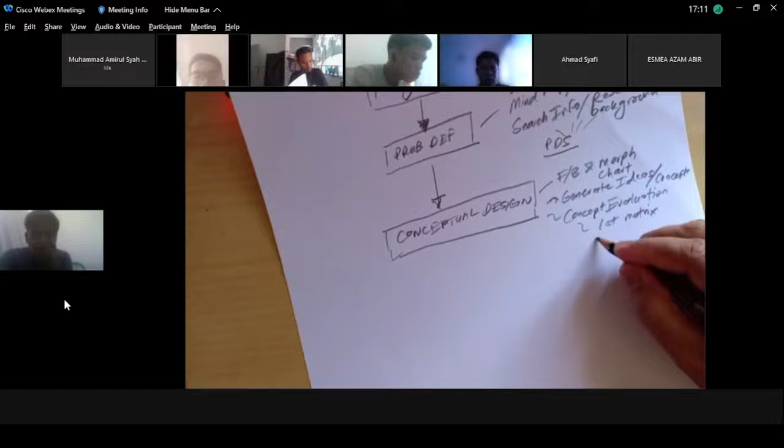Then you generate ideas or concepts, then you do concept evaluation by the first matrix and Pugh matrix. This is already done, I asked you to do it during the break. From the Pugh matrix, the result gives you your final design. This will be your final concept or final design. This is your final concept.

Detail design means you do engineering analysis and engineering drawing. Engineering analysis first, and then at the end engineering drawing. After engineering, then only you do fabrication, you start doing your prototype.

But we don't go straight from final concept to detail design. Detail design means you have detailed everything and document all your design. You have to do detailed analysis, meaning engineering analysis using your knowledge from machine component design last semester and strength of materials, and also ergonomic studies. That is detail design.

And also after engineering analysis and ergonomic studies, then you will do engineering drawing. That one is detail design.

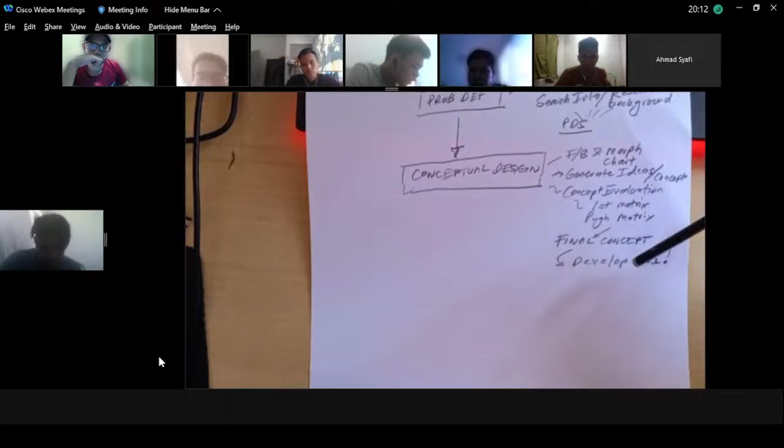But for the final concept, you can identify all components because this is your final concept. You need to explain and discuss with your group members. You have to develop more detail about your final concept, meaning you have to identify which is which, in terms of what components and parts you design and introduce in your system.

You can identify it, even a single piece of component, like even a single screw, bolt and nut, also must be included. Understand that, guys?

At this moment, understand? You need to detail your sketching because you want to design this thing. This will be your final design, final concept, so you want to develop more. It means you need to identify all the things involved in your design.

If you design a device, you have to know everything, every part, component, bracket, supporting structure, all the components, even the component next to another component. It's not just saying this is connected like that. How does it connect? How is this part connected to the second part? How is this part connected to the next part?

It's not just hot glue like that. Is it joined by bolt and nut? Is it joined by snap fit? Is it joined by welding or something? You have to identify how it connects. Every possible thing you have to identify in detail.

You can develop the final concept more because we want to make things happen. So this final concept we want to develop. This stage we don't call detail design - detail design, I said, is engineering analysis, ergonomics, and also engineering drawing.

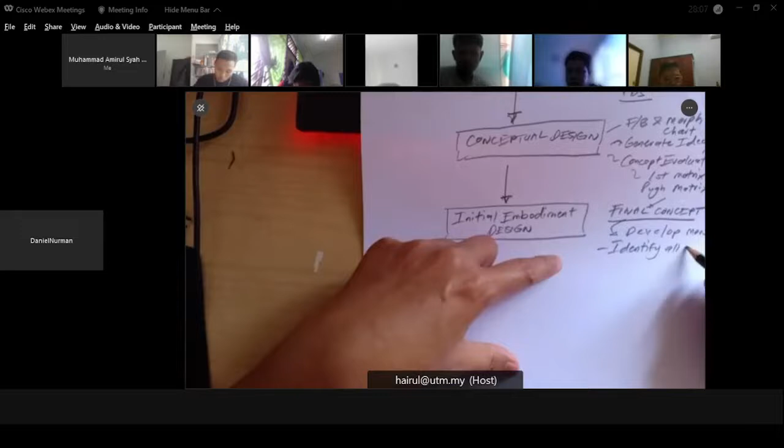You develop more, I mean you've got to, for your final concept, identify all parts involved that you introduce in your final concept. Even a single tiny thing, the jointed elements, screw and nut that you introduce, must be included.

There's no such thing in your sketching, when you do sketching, no component floating in the air. You understand what I mean by floating in the air? No such component floating in the air in your sketch. Understand, class? No such thing as a component floating in the air.

You understand what I mean? There's no such thing as a floating component. Betul tak? Maknanya screw apa semua kena buat juga ke apa? Yes, kena introduce. You can identify where is the screw.

Kalau you punya component, for example, you punya feeder tu kan. Katakan your final concept is the whole system mounted on the cage, on the kandang, because I believe your customer, your sarjana person in charge, already gave you the layout plan. By now you already have the layout plan, the dimension. So how you mount your feeder on the layout, you have a sketch on that, the dimension of that feeder, the detail sketching.

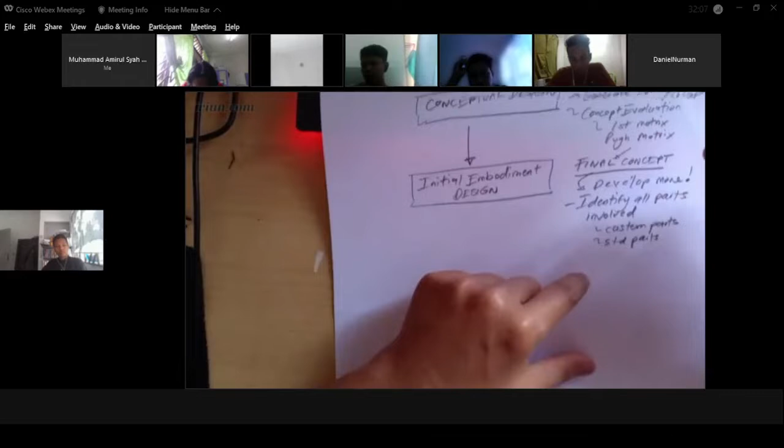You kena identify all parts involved, and also you have to select material. This is important, this is crucial also. Select material. How do you select material of the parts? Parts that you introduce, what is the material?

Okay, certain parts of component dalam your final concept, some of them are critical. Component and critical tu, kalau component like standard part, it's not that. Selection of material is quite easy, straightforward lah. Maybe you select based on the standard material available there in the market.

Tetapi there is certain part, certain component in your final concept, like a bracket, a structure, that is critical, that is supporting weight, that sustains load. The component that is critical. Critical means this part is critical in terms of when your concept, your system, in performance, when your machine is running.

Certain components or parts are critical in terms of loading and in terms of the surrounding boundary condition, depending on the boundary condition. For those critical components, be careful about material selection. I'll show you a video on material selection later, which is crucial only for critical parts.

For components like standard parts that you think you can get easily from the market, you don't need to do that selection process. Just mention the material in the BOM, in your sketch. But for certain critical components, supporting structures when your machine is running, these components sustain load, so be careful about material selection. I'll show you the video later and share it in the WhatsApp group. That's how we select that material.

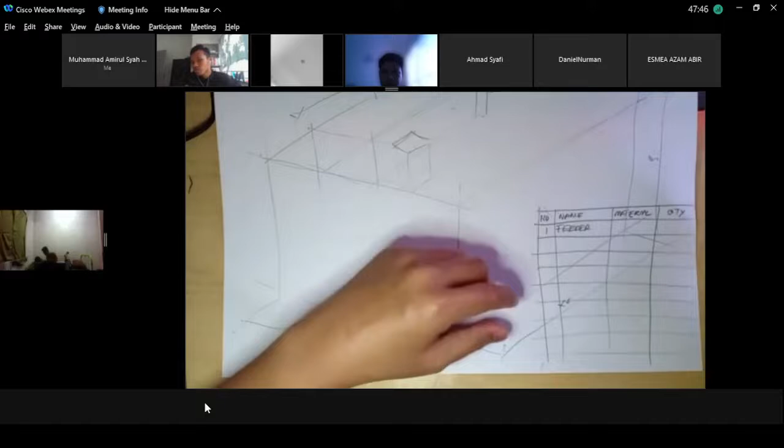Have to be accurate to select the material. Have to be really careful to select the material. Yang macam feeder ni tak perlu lah. Feeder just continue use, tengoklah the one. Tapi be careful. You must obey the what is requirement from the PDS. PDS under heading material ada mention that all the material component can withstand corrosion kan, because you involve your feeder involved with what food you want to contain. It's a cow food, tengok the condition cow food, so your feeder have to be really kind like a standard lah for that one. That cannot easily corrode, can withstand corrosion, cannot get rusted, and itulah they don't have chemical effect.

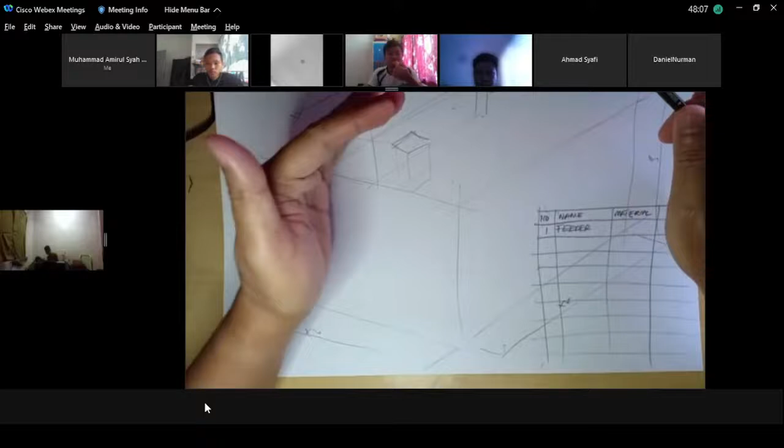These all the statement that already stated in your PDS under material. It's there already. Make sure your PDS tu yang detail lah. I need to check nanti your PDS. You must obey the PDS material part that you introduce, the size that you introduce, must obey all the requirements that we set. Because your PDS also ada mention about heading size, the size of your overall system. Make sure that you obey all the requirements set in PDS. That's the idea of this embodiment design.

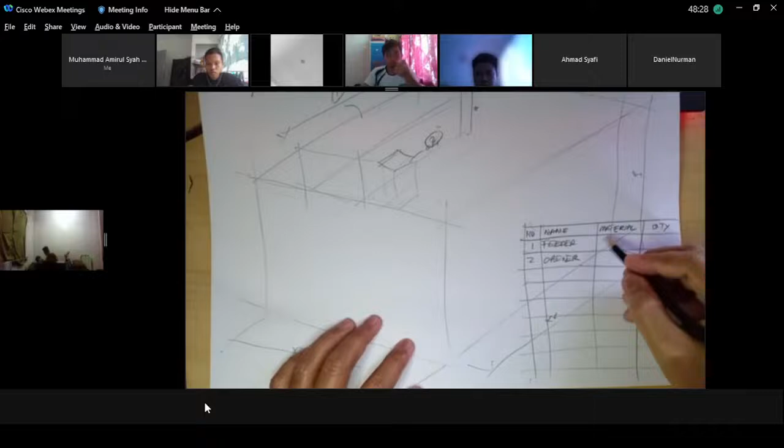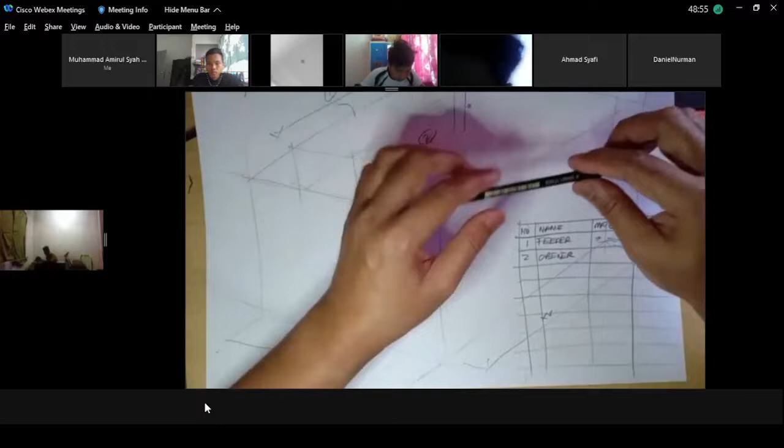You can use steel but it can get easy corrosion, rusted right. What material for the feeder? You need to check, because your PDS already stated what material for this. That's why in the standard there's legislation, if you check the legislation on cow handling, it mentions what material to select for the cow handling device. What material is the opener?

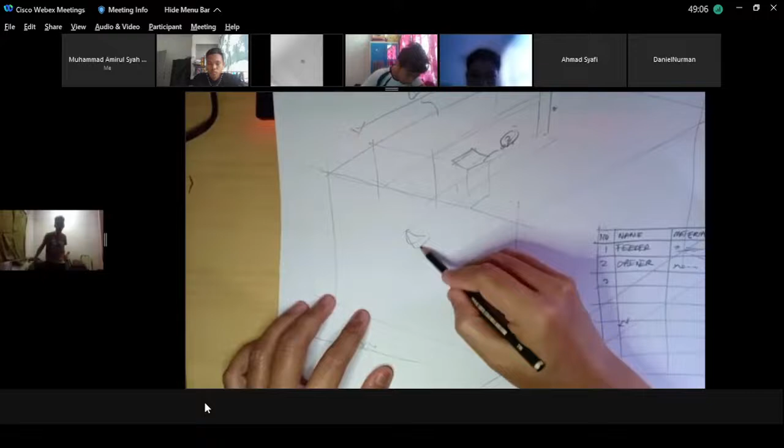Then you have the conveyor, how is it shaped. Conveyor has to be detailed. Okay, this is the conveyor, this is a rough conveyor. This is the BOM of the assembly, rough mode. What is the material? This quantity is 1, this is 1, maybe 2 - maybe one of the group is doing it symmetrical, 2 rows, 2 rows. Say 2, 2 rows. 2, feeder 2, feeder 1, this also 1. Feeder has 2 - you have left and right row because you have a partition.

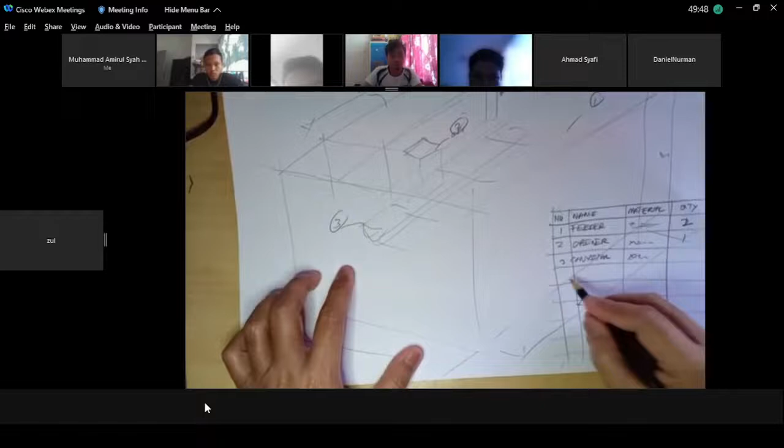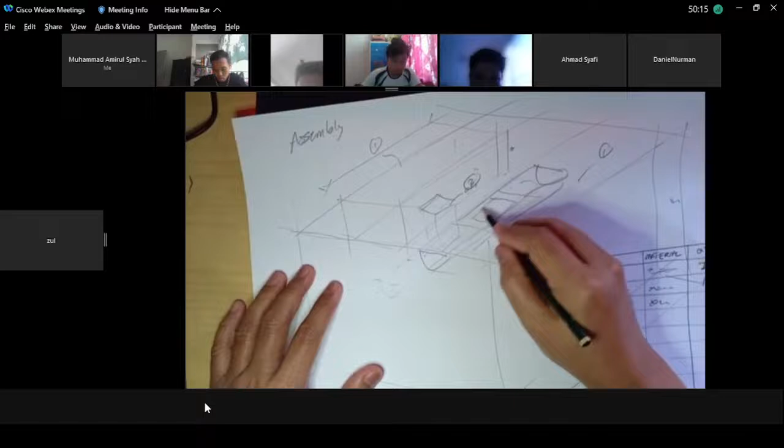Okay, here you have the distributor, you have the partition. This is conveyor, number 3 is conveyor. See it has an indicator, labeling shape, number, and 4 - how you distribute the conveyor, how you distribute it, like the start of this conveyor is the shape, and how the system works, or you focus on sketching the distributor - what is the mechanism when the conveyor distributes the food. This one is for the distributor.

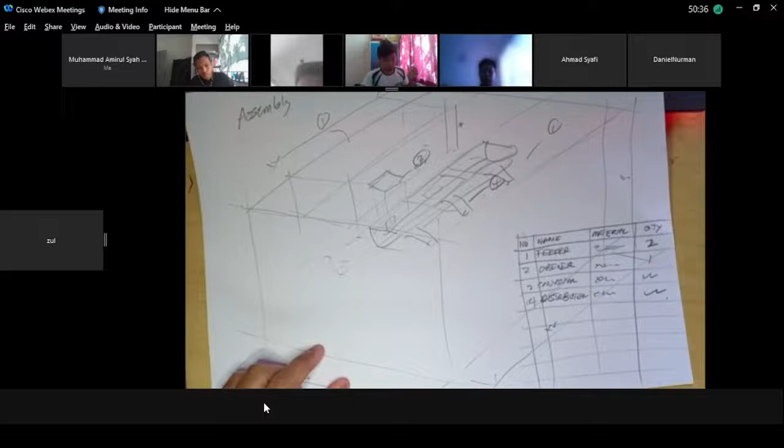Understand guys? What material, what quantity. Do you understand, class? Are you with me or not? Yes, understand Doctor. You make the detail like that.

This is the full assembly first, one sketch of the full assembly. There's a component number, there's a BOM - that's the rough BOM. Under a category - after distributor what's next? Remover accessory, food remover, something like that. Right? Right. Remover, I don't know how you name it. Remover, food remover that's an accessory for food. Excessive food remover - what material?

Where is the food remover for the excess that falls? What system do you use, sketch this. That's it, this full assembly first. You make this one the full assembly, with the dimensions also of the layout plan, the size of your cage, basic dimensions of your tank, and the length of your conveyor, the width, the overall size, not detailed yet.

Okay, this one your subsystem intact. This sketching is the full assembly, everything in assembly mode. Assembly mode. Clear? This one clear? Understand? Any questions from earlier? This is your first sketch. Any questions? Detail - I'm showing you this isn't proper, isn't detailed. You have to be detailed enough.

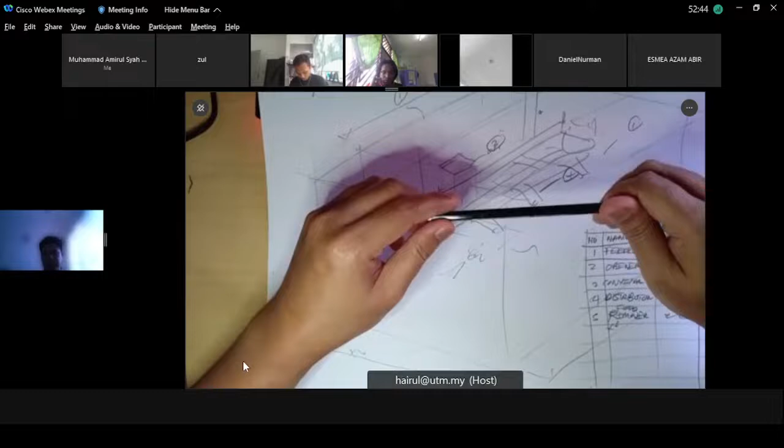How - any other idea? Any idea? It's dangerous, you know, this could be very dangerous if you just guess, that's not allowed. Because I want you to work as a professional. A professional cannot do it like this.

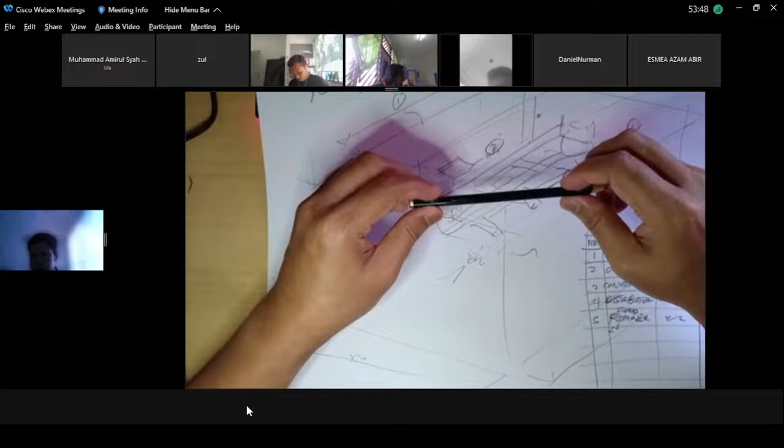What about the other group, the other session, kelas lain ada tak? Dapat apa-apa? Korang ada group WhatsApp yang ada sarjana field? Ada, sebab Cik Kadir tadi balas dalam tu, dia kata tak ada. Tapi pun kelas lain macam mana dia nak buat kan?

Kalau korang punya sistem nak mounted dekat cage, betul kan? Betul tak korang punya final concept? You want to mount, you want to fit your system on dia punya, what is your boundary? You have to know the boundary. Kalau tak ada boundary macam mana? You punya cage itulah, you punya surrounding itulah. Macam mana kita nak guess tu? Dia punya size of the kandang cage.

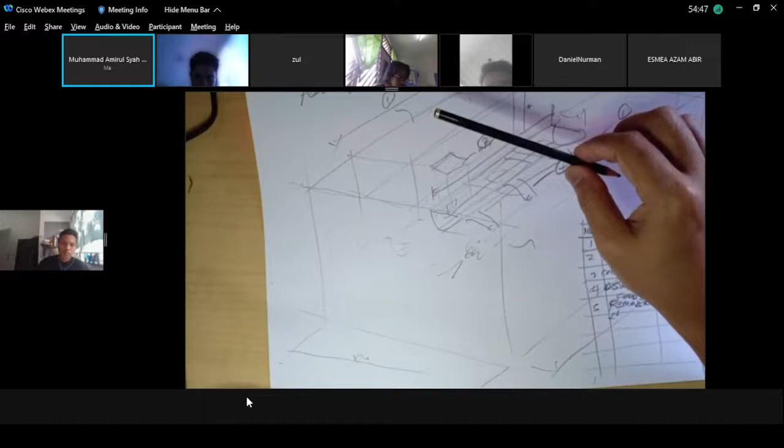At the moment dia punya lembu ada in cage, ada dalam dia punya partition tak? Tak ada. Currently in the cage, bebas, no partition. Dia bebas dalam cage tu, tak ada partition untuk satu ekor. Okay, maybe your final concept you introduce partition lah. Maybe your system, you mesti ada dia punya dimension of overall tu.

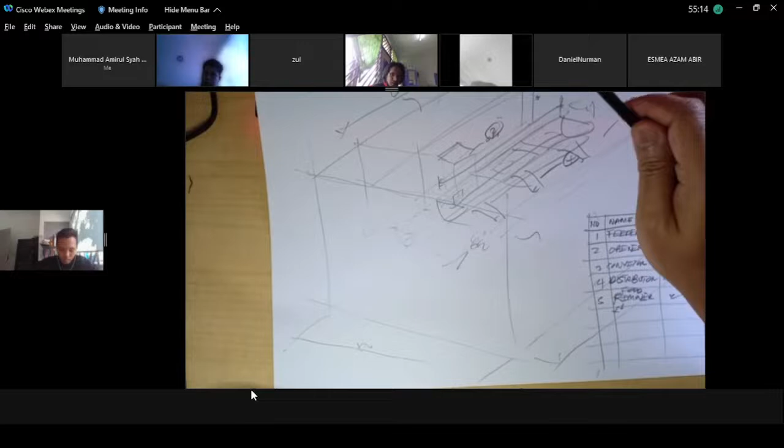Kalau katakan you cannot get it, can you get any standard cage from internet? This is your project guys, you have to make an effort. You can immediately dapat mana-mana cage layout plan yang as a standard can be implemented. Preferably ask dulu Encik Kadir, do you have it? Kalau dah memang the answer they don't have it, okay tak apalah nak buat macam mana. So you have to find from Felda or any from the internet lah.

So okay, my point is, can you get the dimension of your boundary? Boleh dapat? Get it immediately, and this standard cage, boleh guys? Kalau tak ada tu, you tak boleh buat sketching ni, you tak boleh buat initial embodiment design ni. Mesti ada, boleh kelas? Okay, buat benda je, dapatkan macam mana cara je lah you boleh dapat.

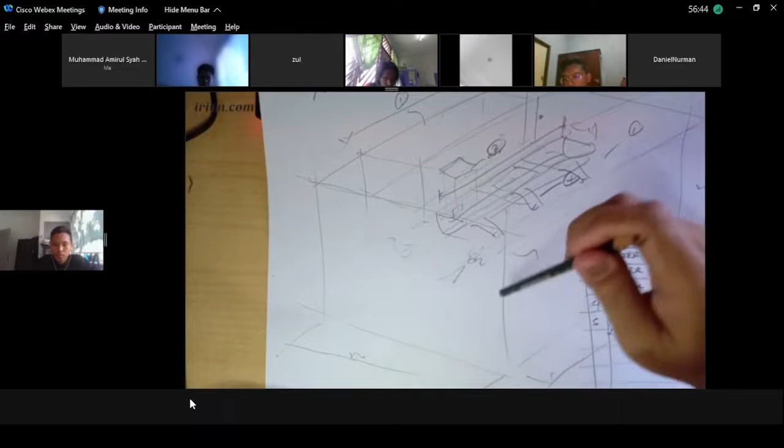Ceiling dia tak ada, dia tak ada no ceiling kan? Okay, so you need to know the condition of yours and also the dimension of it. Tak boleh dapat daripada dia, you try to design your own, boleh? Okay, you already visited the place, they don't have ceiling kan? They only have roof kan, no ceiling. Okay, you design the structure. Faham tak sini? Dia tak ada ceiling.

Guys, can you see my video tak? Ada technical error ke apa ni? Boleh doktor, okay, nanti kau buat macam ni tau.

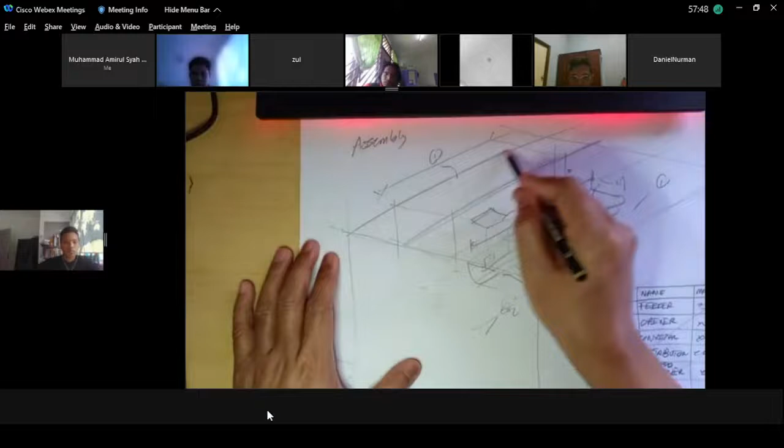Okay, let's say ni layout plan. Saya believe dia bumbung je kan, only roof, right? Plus, can you see my sketching? Nampak tak? Nampak doktor. Pasal korang ni ada boom kan, ada boom structure, betul tak kan? Ada beam kan? Hello? How you introduce your final concept tak? You have to specify all the part that you introduce, you want to mount on yours. Ada boom sini, ada apa ni, very long beam where you want to mount, where you want to fit your mount, your feeder.

Okay, the boom, kena letak sini komponen ni. Ni komponen ni apa nama dia? I didn't mention, boom is not the right word, we call it the beam lah, beam, horizontal beam. Ni komponen nombor berapa? Nombor 5, nombor 6, horizontal beam. Understand tak? Ada 2, how many?

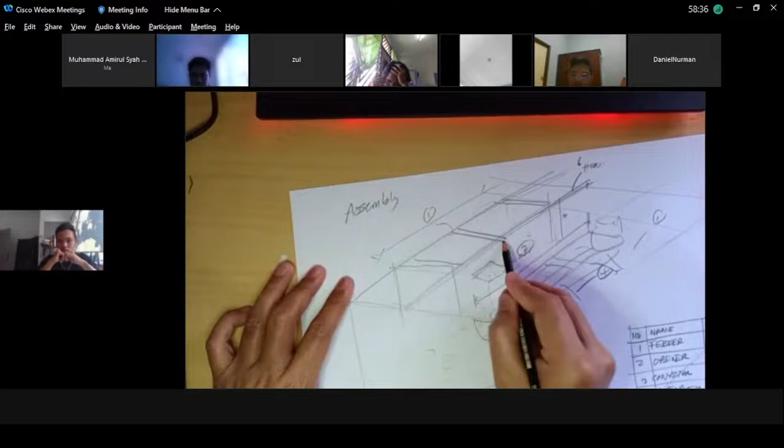And also you ada cross member beam, betul tak kan? Ada cross member where you mount, you want to mount, katakan your feeder tu mounted on the ceiling, you kena introduce ni dalam sketch. Faham kelas? Yang penting dapat layout dulu size macam, okay, I believe dia punya bumbung like that. They don't have ceiling, right? Betul kan? Just bumbung only, just only roof, no ceiling. So you have to design the beam.

Pasal guys, you are fourth year, betul tak guys? You know what component is it kan? Boleh tak sketch benda ni? Komponen apa ni? Kalau ikut standard kita pakai apa? Boleh doktor, insyaAllah. Horizontal beam you design or you order from the hardware? I want to ask you guys, what beam you use? You are already fourth year guys. Apa beam kita pakai? Box section ke, C channel ke, I section?

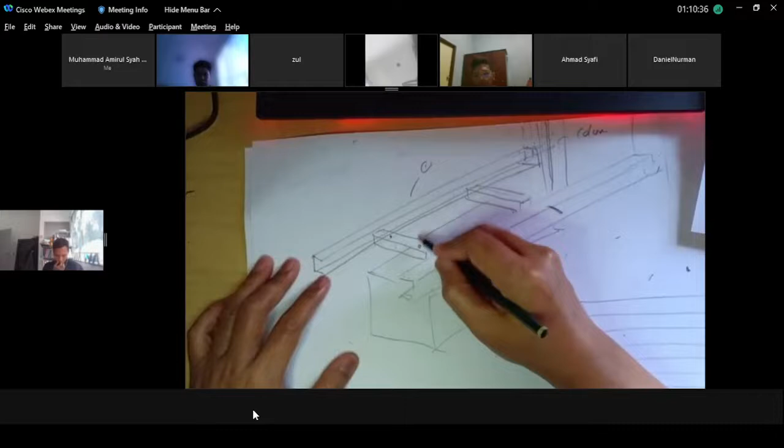How does this connect? This is what I'm saying - at this initial embodiment design stage, your sketching has to be proper, guys. If you don't identify all the components involved, you will have a lot of problems later.

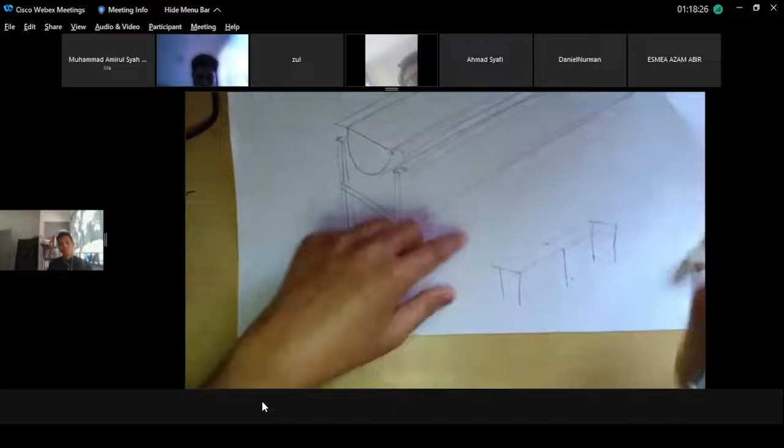Kalau macam ni dia tak teguh kan, so how many leg that you need. Okay, kalau you tak boleh letak cross member kat sini pasal you want to mount the conveyor, so how you design supaya dia keep stiff dia rigid. The leg tu, how you design the leg tu macam mana.

Maybe you buat construction terus ada kaki macam apa, ada kind of structure like this ke, semua ada cross member kat bawah ke, or maybe kalau you can make it, dia ada cross member. Kalau you cannot put cross member, kalau you ada cross member macam ni, you tak boleh mount you punya conveyor.

Dia mungkin you conveyor, okay, conveyor have to be mount on top gitu. So you punya supporting leg ni have to ada cross member, have to be rigid enough lah. Yang ini dia kena rigid lah, dia ada cross member macam ni, cross je ni ke. How you design dia punya structure tu lah, dia punya leg. Okay, dia rangka macam tu.

So my point is, so lah you kena proper kat sini. Yang conveyor tu, okay, conveyor tu how do you move it? Dalam you punya final concept, you punya system, how is the mechanism that convey the food? Kalau you pakai flat bed conveyor, so kalau katakan you punya design pakai flat bed conveyor...

So you don't need to do detail sketching lah, as long katakan you order this conveyor. Katakan your conveyor tu you order from the internet, they have a standard conveyor. Okay, design ni bukan semua kita design on our own. Kadang-kadang we have to play smart. Sometimes kita tengok whatever current supplier already there.

Then the distributor, looking at the full assembly, after the conveyor, how do you distribute the food? I don't know, is your conveyor moving or just placed under a container? Maybe you make it slanting, I don't know, that's your concept, the slanting is there, but this is wet food. If it's wet food, I don't think a gravity-based slanting conveyor will make it flow down. Maybe you use a shaking mechanism from the opener, from the feeder.

If you have just a simple channel, you don't have to buy a flatbed conveyor, which is very expensive. Or a screw feeder, also good, very efficient to distribute the food equally, but it's quite expensive. If you just use a simple channel, but make it slanting to distribute the food, because it's wet food mixed with something like grass. What do you call it, what shape is your food?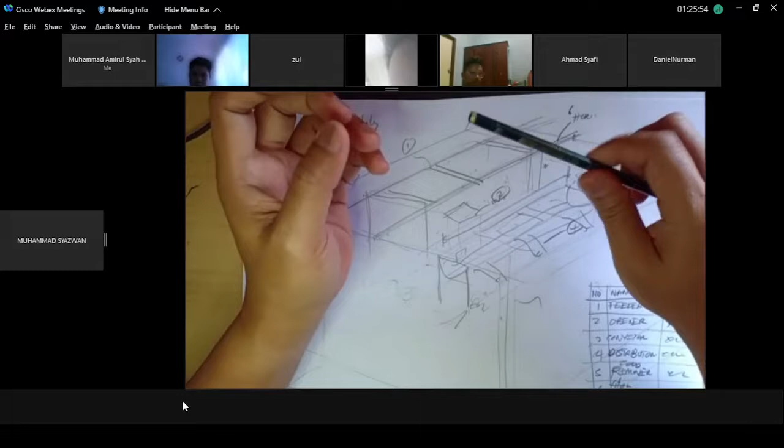Kelas food dia apa? Food. Kalau kelas, orang yang do the research, come on, the food tu what type of food? Food dia material dia apa? Condition dia? Apa dia punya form and shape, the food? What kind of food dia tu? Is it granular or is it wet food, macam mana tu? Campuran the apa? From apa? Ubi kayu, jagung, ampas jagung, apa ni? Plus, are you listening or not? I'm asking you. Yes, betul.

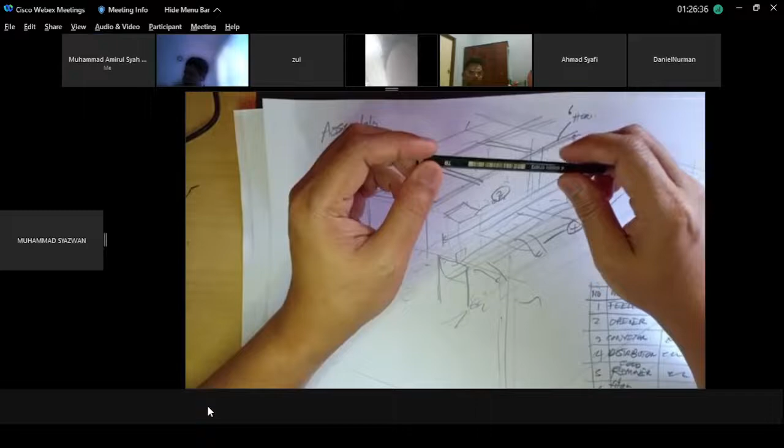Food dia macam mana condition dia? What type of food? Cow food? Rumput ke apa? Potong halus. Campur apa? Plus, campur dengan nanas, dia bentuk apa? Dia kind like the hancur ke? It kind already hancur, blended betul. Or okay, maybe one of you already blended kan? Maybe you punya concept blended. So dia dalam keadaan kind like sticky kan?

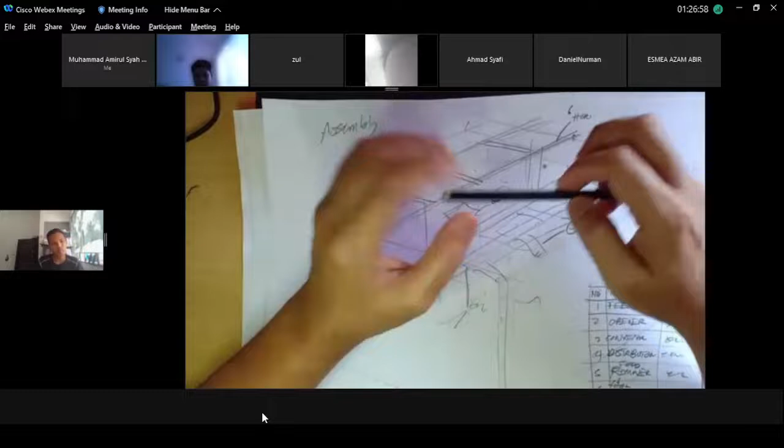Okay, my point, the food gets sticky. When you open from there, you don't think, you got to make sure that from the tank tu, your food will get stuck from the tank. Your opener tadi, I'm talking about opener tu. Opener to have kind like, your tank to have kind like shaking mechanism.

Rasa macam mana? Yang tadi. Dalam your sketching tu kena provide me. Dalam your sketching you kena explain juga yang apa tadi? Yang container tadi, yang feeder tadi. Mana pula sketching? Ini dia punya beam, mana tadi sketching?

Ada container, kita tak show. Kita tak buat sketching on container.

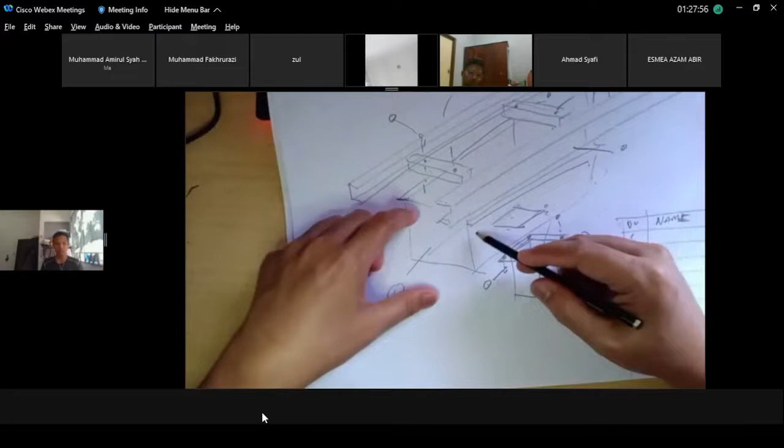Okay, ini bawa. Okay, you punya tadi yang buat feeder tu. You punya opening, you punya food ni, I think ini saya rough saja, you punya bentuk dia tak doesn't mean box, maybe hopper lah, you punya feeder tu have to be. Guys, saya ni just mumbling about the concept, maybe your concept different, much better than me. You punya, I think you punya feeder must, you punya shape of you punya feeder mesti hopper lah, if I'm not mistaken. Kalau you buat box section, kalau you open, do you think you punya food tu akan apa, will be pull, apa, will go down?

You think you no, I don't think so. Pasal you punya food like kind like sticky, dia irregular punya shape condition dia. It may be sticky, maybe dry, mixed condition. So I think you must have your feeder ni mesti ada kind like shaking mechanism lah. So you introduce you punya shaking mechanism to make sure that the food will be dumped out into this opening. Understand tak, guys? You know what I'm talking about?

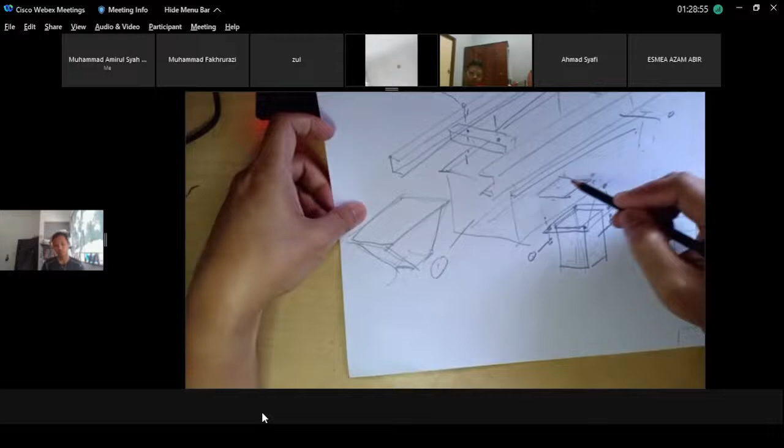You mesti ada, kalau you flat macam ni, I don't think so. Dan you mesti bentuk hopper shape. You katakan you design macam tu. You must have ada shaking mechanism, either forward movement or left and right movement. So you introduce your shaking mechanism ni mesti ada dalam your punya component sini. So this is my talking only. I don't know your concept because I haven't seen your concept.

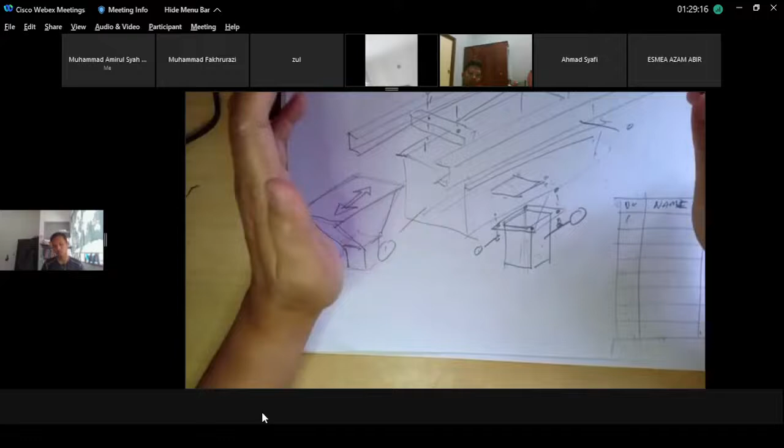Normally kalau group dia present to me their final concept, then I can make a comment to dia, for example then only they can throw the food into this channel, then this channel they go to the apa tadi, the C channel. Ni yang opener. Okay, I'm talking about the C channel. Kalau you make C channel, kalau you buat the horizontal flat macam tu, dia takkan distribute, dia takkan flow.

Kalau you buat dia slanting like this, okay, this front view lah, you punya channel tu at an angle, ada theta ni. Okay, you punya food dah jatuh sini. You want to buat channel and kemudian the channel kemudian they will distribute lah. Tetapi you want to make a flow pun, the channel ni can get stuck lah. So, ini pun kena shaking mechanism, betul tak guys?

Ada shaking mechanism. Ini contoh kalau your concept is, betul tak? Kalau you just a simple channel, you need some shaking mechanism tu, dia akan jatuh. I don't know, is your creative, how you punya final design, I don't know macam mana. So that's why I need you to present to me by next week, you punya final concept juga. Maybe kita can modify some little bit. Sometimes I can make comment whether it works or not based on my experience. Understand kan?

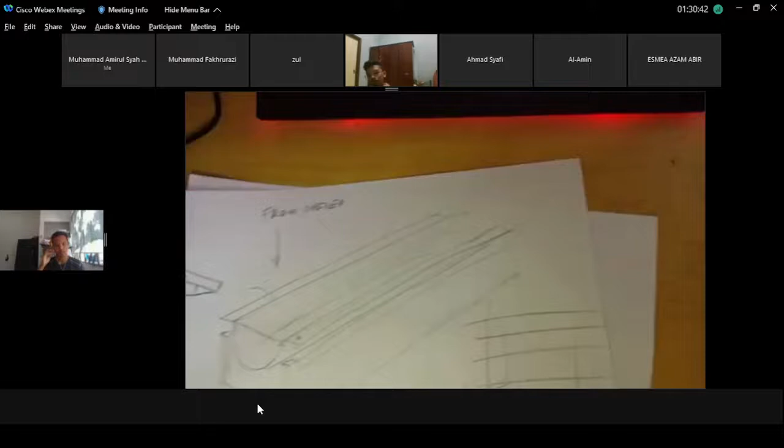So I'm talking about how you convey the channel. Kemudian you need, okay, the other student will, the distributor also have to make sketching how you distribute the food. Okay, maybe distribute the food tu yang critical distribute.

Okay, katakan you have 3 channel. The distributor is thinking about how you convey and distribute. The student will focus on distributor, focus on the mechanism. Maybe this you already discussed during your evaluation concept, during master evaluation already discussed. You know what mechanism you're going to use. It's already there, I'm just mumbling. If I haven't seen your final concept yet, you know already the system.

Okay, distributor have to make proper sketching the detail. Understand class? No such thing component floating. You have mechanism how you distribute, you make a proper sketch. Class, faham? Clear or not?

Clear. Detail sketching, distributor kan detail. No such thing component floating, every single piece, screw, spring, kalau bearing ada, macam for example you have shaft. Katakanlah your component have shaft kan. This is a shaft, no such thing shaft floating. Okay, shaft cakap dia ada bearing. Shaft ni mount on what? Bearing mount on shaft. This bearing mount on what? Bearing kan dia ada bracket kan, mount on what? Bearing mesti ada frame dia. Betul tak? Understand tak?

Understand tak guys? Macam your machine component design your project, kenapa? Kan you design shaft, you letak bearing, so your lecturer akan complain where is this shaft mount on, you mesti buat ada structure, betul tak? Betul tak kelas your machine component design your project? Betul, mesti ada, every single piece of component must be there, how it mount dalam your structure. The shaft must be supporting dia mount on what? On the frame, on the bracket, so on.

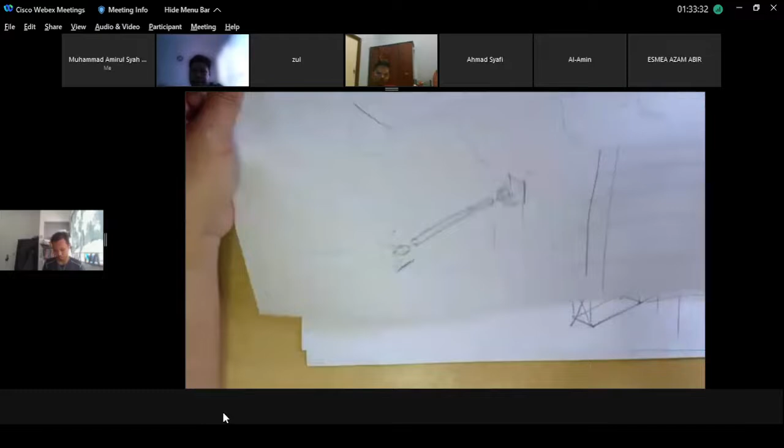Pasal ini design work, detail, kena detail sikit. Faham, distribution kena detail, BOM ada. Boleh tak? BOM ada, every single component, inverse, shaft, you introduce mechanism, mesti dah. Tak ada yang floating in the air. Semua mesti ada tu, ini yang korang mesti ada. Ini penting ni guys, mesti ada BOM, ikut group. Faham kelas BOM.

Overall tadi, BOM, overall layout. Mula-mula overall tadi, overall assembly drawing. The whole system dengan case, itu pun mesti ada juga. Ini korang dulu ni. Siapa yang champion tu, dia kena buat dulu overall layout.

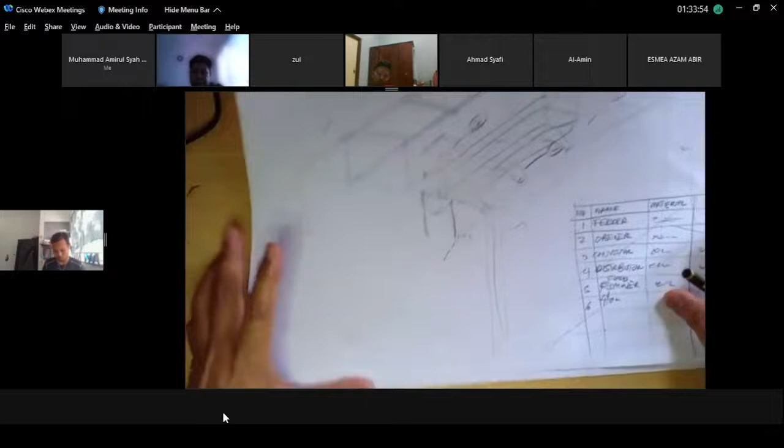Dia katakan you punya decision from your geometry, the champion, you tak ada buat merging. Okay, so yang champion tu have to design layout dulu, dan kemudian dia kena explain to all the team members how we gonna make this thing works. Faham? How we gonna make this thing, your system works. Ni yang kerja dia, so I've been talking about it.

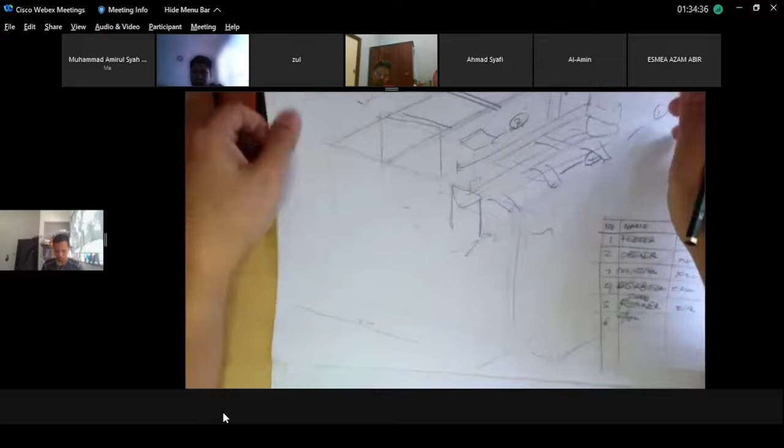Ini peringkat what we call, guys, after conceptual design, you get your final concept, right? This is what we call initial embodiment design. Kita not yet detail design, guys. Detail design tu jangan misunderstood. Detail design tu nanti is just about engineering analysis, that is it, and you do fabricating after that. Itu and ergonomic analysis, I explain to you, itulah during on that stage.

Ni initial embodiment design, you kena ada BOM. Okay, mula BOM ni, detail BOM. Nanti bila you ada list of BOM of all you punya subsystem, then only on the next week I will explain kita gunakan design tools, kita design for example design for manufacturing. Syaratnya, to do DFMA, design for manufacturing and assembly, you mesti ada list of component involved dalam up system. Understand me guys? How do you want to know list of component?

The one that you're doing right now as you to do, you have to susun all the list of BOM, every single piece of involved. Nanti kita akan study that BOM of your component that you introduce, then we baru boleh gunakan tools DFMA. DFMA mean kita simplify kan, kita reduce a little bit, easy to assemble, easy to manufacture. Tapi syarat for you to easy to assemble, easy to manufacture, you need complete list of this detail.

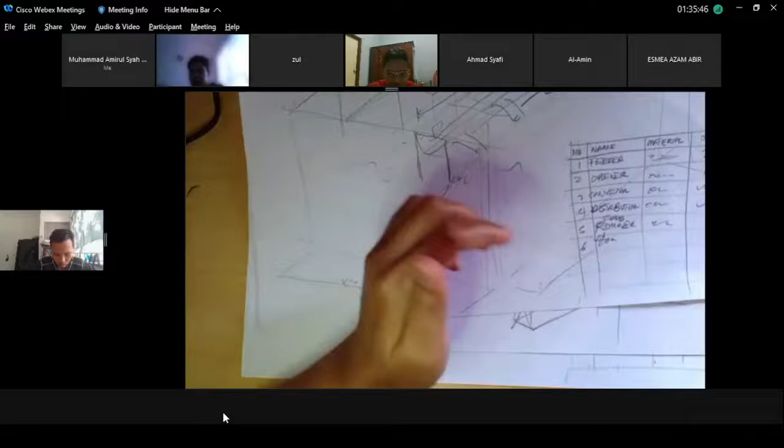Every single piece that you introduce, you kena listkan dulu. How do you list? You cannot list by just doing BOM. You kena sketch properly. You have to sketch properly and make a BOM, identify a component. And also remember guys, material.

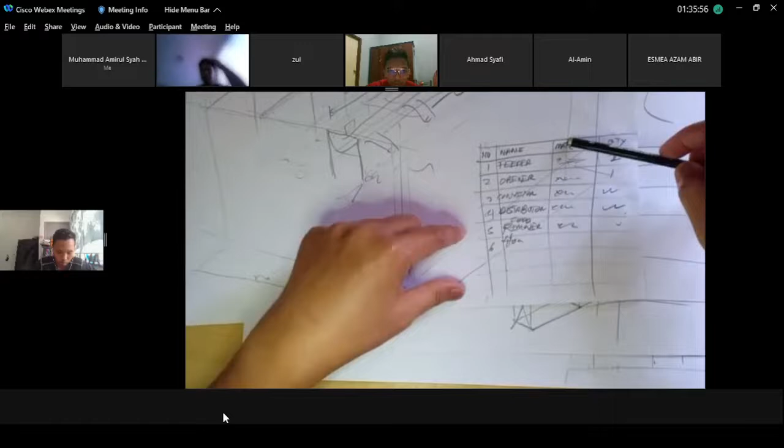Material also. Material ni guys, bukan all material. Certain material you can guess, you can select material based on your knowledge, for your information get from standard material that you know. Macam like the beam book structure, kalau I get from the internet or structural beam, okay that's it still lah. What type of steel they use, you put that material in.

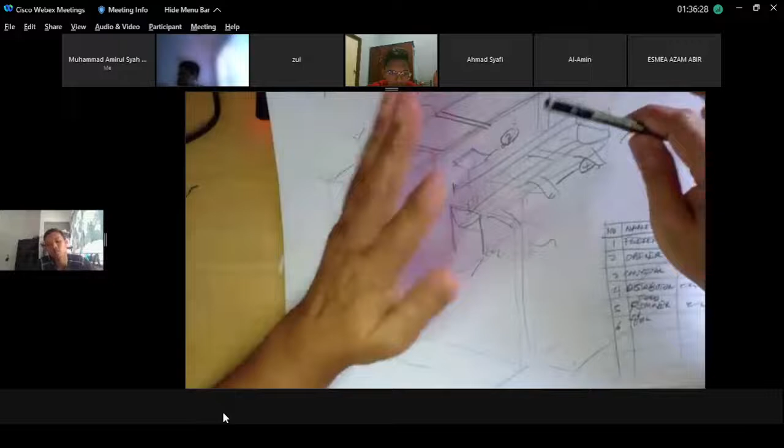Tetapi that material parts that you introduce, certain part like crucial, critical, because involved dengan high loading. This material you cannot just simply want to use steel, tak boleh. You have to be careful lah. There is a proper way how to select material.

Nanti there will be a talk guys about how we select material, not this week, by lecturer from manufacturing, from Fahad. Dr. Nuhayati will give a common lecture. Remember kita ada talk dulu on the project management, right? Ni yang second talk, there will be a second talk of material selection, how you select material dalam you punya design.

How you select material, not all material you simply select. There's a way, safe way to select material. Okay, dalam BOM tu I mention ada name, you identify material also. Certain yang crucial saja yang you kena tengok the top tu, crucial material, material yang important.

Yang material yang standard you can get, tak apa, you can simply select the material. Yang crucial ni yang critical part. Okay, later I also share you ada YouTube video, you can look at that video about material selection, only on critical part. Critical mean you have to make a big, macam yang you design aircraft lah.

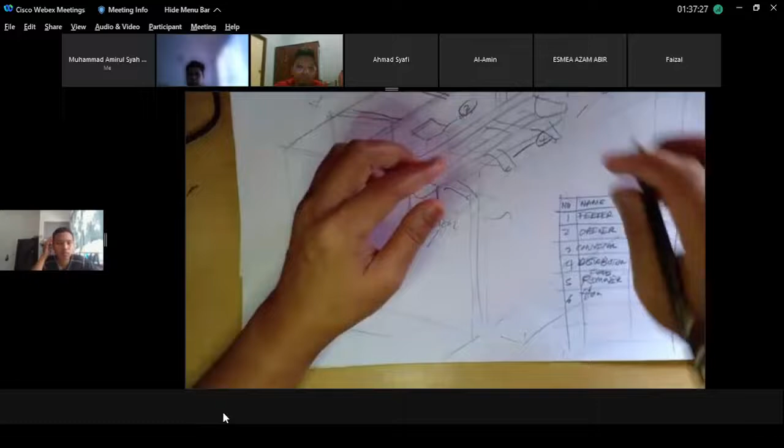You design a bicycle. Ada video tu explain to you about bicycle tu structure, macam mana dia select material frame bicycle tu, yang mana yang really pasal bicycle dia punya frame dia need to be light and strong material, that dia punya frame of that bicycle.

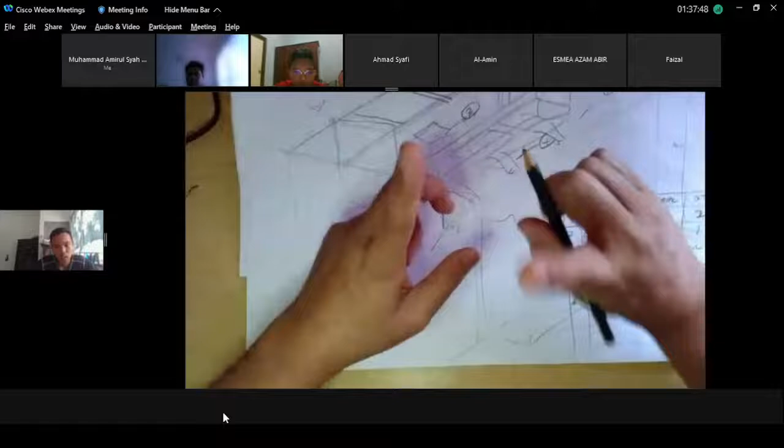Macam the wheel they have a lot of spoke kan. What material of that spokes? Itu crucial pasal the wheel tu supporting the load. The spoke supporting a lot of spoke in between the wheel, that is crucial method. Also the frame, the shape of the bicycle itu crucial pasal dia supporting the load, the impact on the wheel and also the weight of the cyclist.

Itu crucial material. Macam tu you have to use proper way. I show you a video nanti on the WhatsApp and you can look at that. Tetapi not all material you have to use that proper way, like simply material you judge based on standard material, only yang critical.

Okay guys, boleh faham apa saya kata? Alright? Ada question? 1 week lah, 1 week you have to do this. Boleh.

Right, okay so I think we don't have class now on that. That's why we need to focus. Tetapi I think guys, nanti next week kena present juga. I tak decide lagi, tapi it will be next week.

Second meeting you kena present to me, either recorded video in YouTube. You have to make your punya presentation really impressive. Either recorded, during short time saja dalam 20 minutes presentation, everyone must talk, pasal I will judge nanti presentation on individual. Nanti the format of presentation tu I will inform you.

Kan, I think on kita the next class is Thursday kan, no class lah. I want you to focus on this, ini memang heavy duty punya work lah. Focus on doing this. Boleh boleh guys?

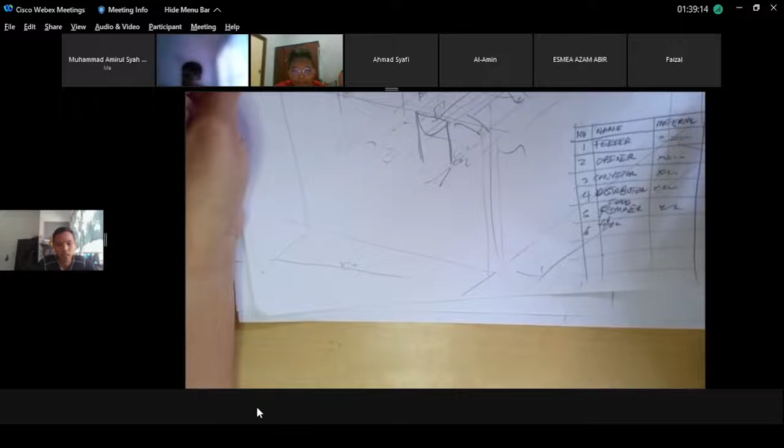InsyaAllah boleh doktor, insyaAllah. Okay macam ni, pasal ini memang busy moment, busy moment kita 1 week sekali meeting I give you briefing.

I hope you understand apa yang talking about. By next week tu you must be ready lah. Kalau you tak ready, by next week also I want to explain you the FMA. The FMA ni cannot be done kalau you tak ada complete list of BOM.

So what BOM you are using right now? All you punya subgroup semua BOM tu misalnya. BOM tu ni, BOM ni kan you learn drawing guys kan, BOM kan bill of material. So you make your sketch ni complete.

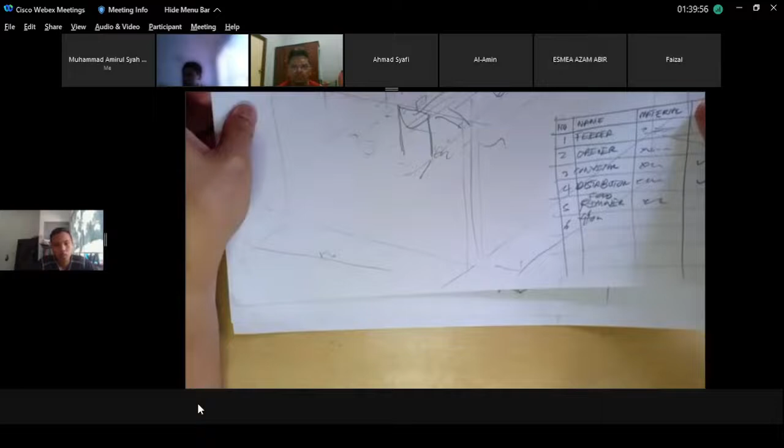Every single piece of component must be there, the single screw bolt and nut also must be there. Pasal you kena identify. Bila you ada list of the BOM, baru we can apply the tools of the FMA. Itu will be on the next stage. The FMA kita simplify, kita reduce the component.

Dia ada prinsipal-prinsipal kita kena obey lah. Dia ada berapa prinsipal kita kena obey. Kita explain later on next week. Okay kelas, kalau tak ada question, move attendant.

Banyak. Tidak tiap attendant. Lain kali tunjuk muka boleh boleh kelas. Next class next week apa? Ada sebagian. Alright, good.